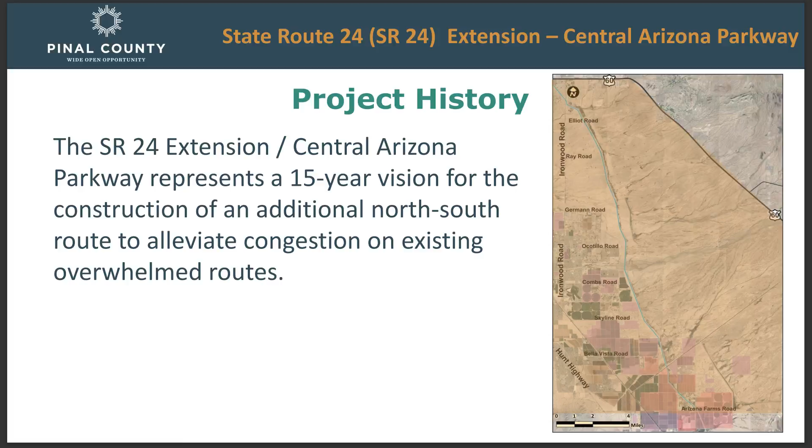As was mentioned, this is not something that has been started recently. When we started looking at these improvements for the last 15, 20 years, many of you may have been to several different meetings held to talk about the improvements. So as we look at this particular area, that's the big picture in 15 years.

These are all the different kinds of planning studies that our various agencies and partners have participated in. These are studies that look at projected traffic numbers, where the development's going to be, where the people are going to be growing, how much is coming into the area. The first one on top is Pinal County's regionally significant routes. Back in 2008, they shared with you a vision for how this area would get developed.

Look at all the particular routes proposed between Santan and 79 in the ultimate future. This is down the ways, but we have to plan for that kind of development, because if we don't plan for it, you know it's going to happen, and we have to have those provisions in place. So just one example of what the county has been doing in terms of looking at the future.

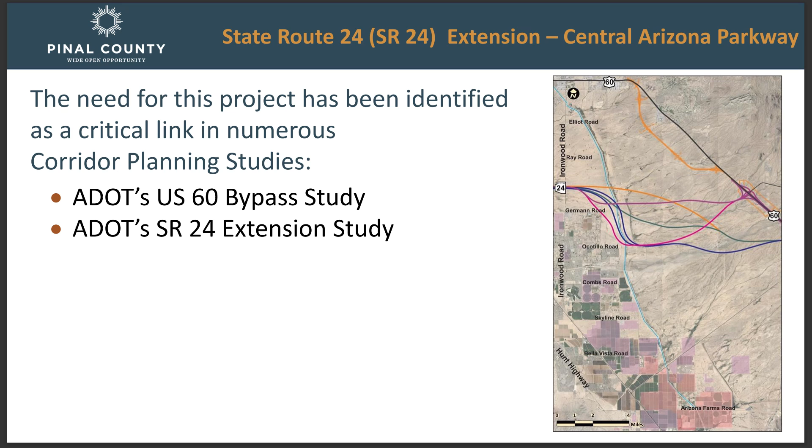ADOT has come up with several different studies. Many of you may have participated in the realignment of US 60 going around the festival grounds and looking at a different route for that. ADOT then continued looking initially at SR 24, extending it to Florence Junction and all points east. We had several different corridors and concepts that looked at that.

Then we've already mentioned the north-south corridor. The north-south corridor you see is a single alignment now, but it had all sorts of different alternatives that were considered at the time when these different alternatives were being developed. So on our graphics, we've kind of shown where those corridors have gone to and where the north-south is shown, where SR 24, we believe, working with state lands and ADOT, will be going and looking at some of those improvements.

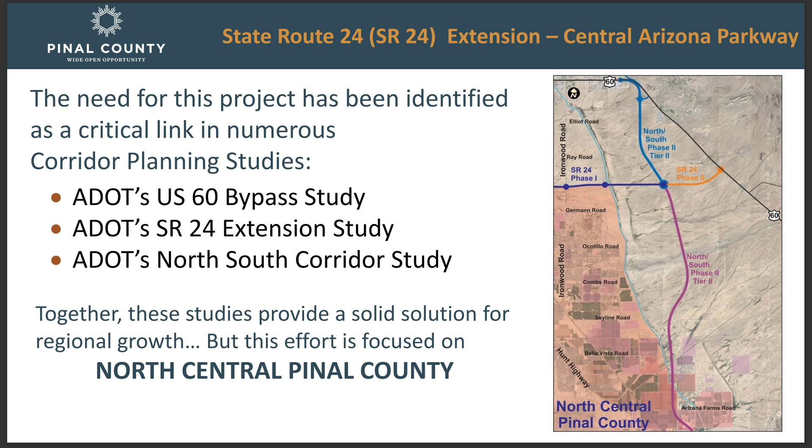Now together, that serves a great regional solution, understanding that the north-south goes from 60 all the way to I-10. Great regional solution, but we're looking at all the congestion going on in this particular area. So that's the north central Pinal County that we're really focused on tonight with these improvements.

So with those other studies, we threw all the alternatives up. You can see there were alternatives that considered making north-south improvements on the west side of the CAP. That became the starting point for some of our alternatives. What we've shown in the back is a series of alternatives that, given the criteria, try to fit a capacity that's not on top of someone's home or existing development. That pushes us almost all the way over to the CAP, but there's still room next to it, and that's where we're trying to fit this facility.

As we get further south, SRP has infrastructure going in next to the canal that doesn't allow us to fit that corridor through that area. SRP is making provisions for the same thing the highway departments are doing, trying to meet power needs. There are generation stations, a combination of solar and gas being built for new generating stations, as well as other power facilities. That made it difficult for us to continue the corridor.

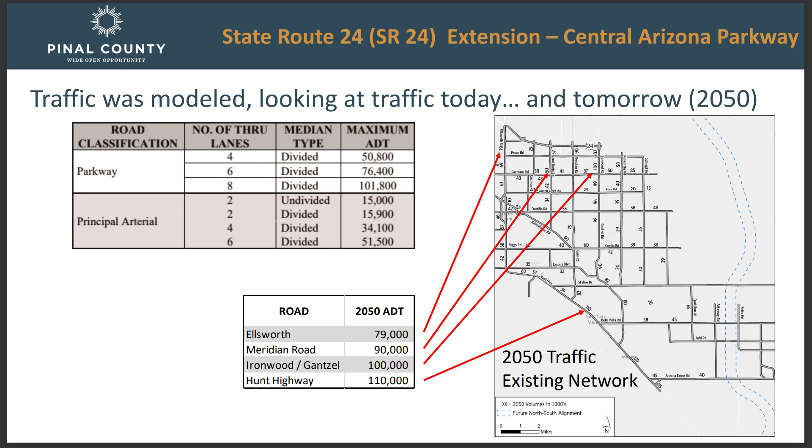You can see that Ellsworth, granted this isn't today but 25 to 30 years out, if we don't build anything else, would be at over 79,000 vehicles per day. Meridian Road, 90,000 vehicles per day. Ironwood, Gantzel, 100,000 vehicles per day.

Now notice what a typical city street can handle. If we put in a 6-lane street, most of the time we call it a 7-lane street because of the turn lane, 3 lanes in each direction, that street can only handle about 50,000 vehicles per day. If we made every single north-south street a 7-lane street, we still wouldn't have enough capacity to bring in the amount of traffic heading south. That's a staggering fact.

Everyone says, well, let's just make the arterials bigger. But when we make the arterials bigger, we have to widen them out, and that takes away homes. When we add to those arterials, we also have to put in more driveways.

More driveways means more access points, and more access points means slower traffic. So it kind of goes against the flow of how we're trying to do a high capacity facility. We're trying to find a location where we can put a higher capacity facility without all those delays.

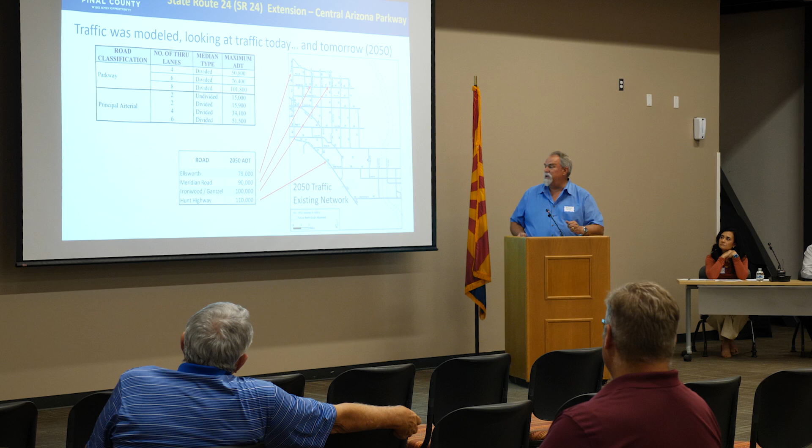Hunt Highway, same thing: 100, 110, 120. Looking at that traffic in the future, the red lines show volume to capacity—in other words, how much the existing facility could handle versus how much it will have to handle.

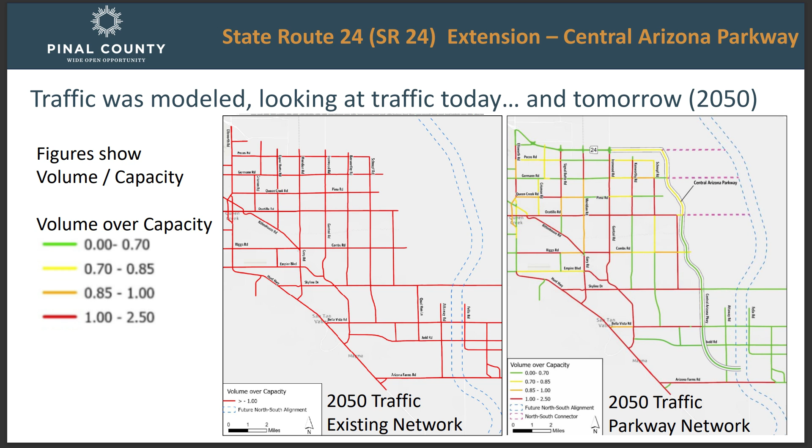Basically everything is overwhelmed into the future. If we were to look at building something like the parkway we're proposing, here's 24, here's the parkway going along the CAP. Look at the kind of impact it has on the rest of the street network. All of a sudden the other streets aren't so overwhelmed. Granted, there's still some red lines on east-west because we're going north-south, and those of you that have to go east-west have limited opportunities. But look at how much the rest of the network improves. It's a major improvement to the area, and that's basically our goal.

Click. Okay. Click. I was deep in thought.

So with those challenges, what kind of facility are we looking at? What is a parkway? Is it a street? Is it a freeway? What are some of the options we're looking at?

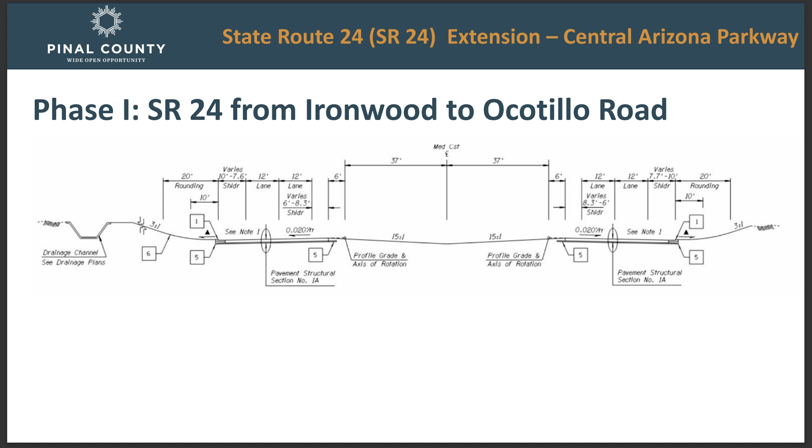Then we'd take that same type of roadway and continue it parallel to the canal down to Ocotillo. That's what we're showing as phase 1. Phase 1 would be built at grade, the same way SR 24 is built today. We would build the bridges in the future that would go over at Germann and Ocotillo. But in the meantime, we would get ourselves almost 5 miles of highway all the way down to Ocotillo to help with traffic movement.

It also allows for future expansion into the median to make that a 6-lane facility in the future. So that's the blue lines we're talking about—you can see the dots. Ironwood already has the interchange. There would eventually be an interchange here, which is just a connection between the Parkway and SR 24.

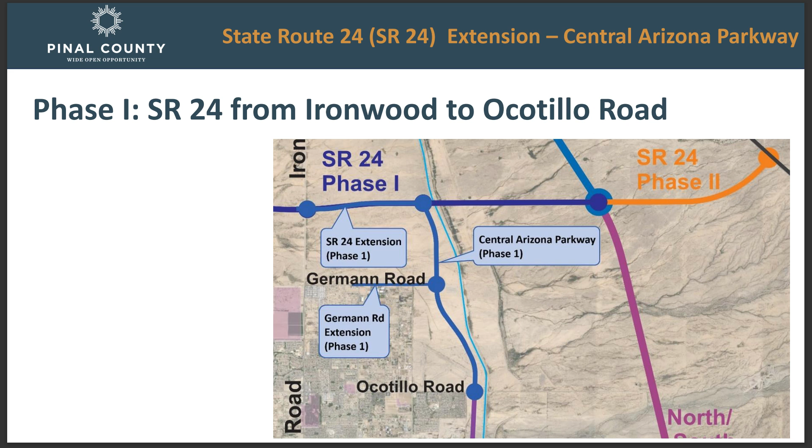SR 24, as I mentioned earlier, ADOT is working with the county to continue it initially north-south and then ultimately tie that into US 60. So this is what we've been describing as phase one. The interchanges are on Germann and Ocotillo initially—they're 2 miles apart.

Federal highways, from a safety perspective, prefers that when we look at these high capacity facilities, we put interchanges 2 miles apart, not 1. Now, how many of you have tried to get on with only 1 mile between interchanges on the Superstition, and simply didn't have enough room to merge and weave, especially when someone else is trying to get off at the same time you're trying to get on? So for all of these, we're looking at a 2 mile spacing between interchanges.

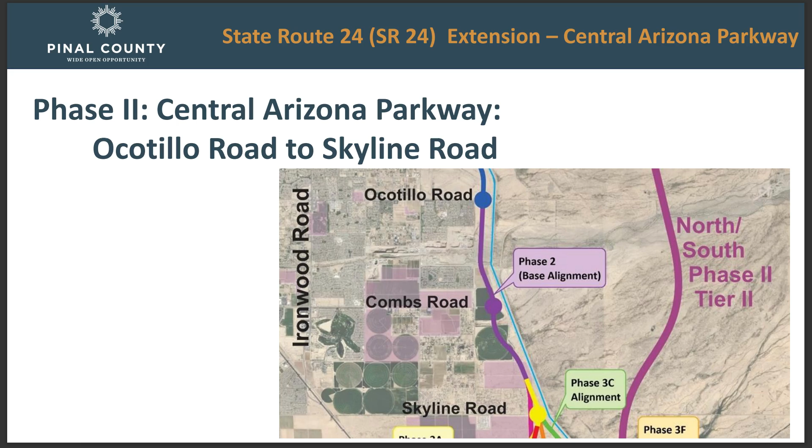And we'll work with the development to make certain all the arterials collect at those points. Continuing, again, we're against the CAP. The reason is there's no corridor anywhere further to the west for us to build something. So we're snug up to the CAP, but you can see where the Queen Creek Wash is—where we have existing developments, we still have quite a bit of room to put that facility adjacent to those existing homes and communities.

With the environmental document, we also do studies for noise and air. So things like noise walls will be considered as we build these improvements, to mitigate the fact that something new is coming next to your community. The argument that 'I moved here 20 years ago and I don't want it to be an urban area' is a good argument, but all your neighbors moved in too, and that's why we're trying to bring a facility in here.

We're trying to make it as quiet and as accommodating as we can, so we'll do the noise improvements and the other improvements we're talking about, and we've pushed it to the side so we take the least amount of impacts. Now, when we get to Skyline, that's the last interchange that we have room to build, and we'll continue to make that a divided intersection just like Ironwood and what you're used to.

But as we look to the south, all of these different areas that are colored in are developments that already have plans. You can see there's an awful lot of developments already platted, plans are underway, construction's underway, and it's very tight for us to do something like an expressway.

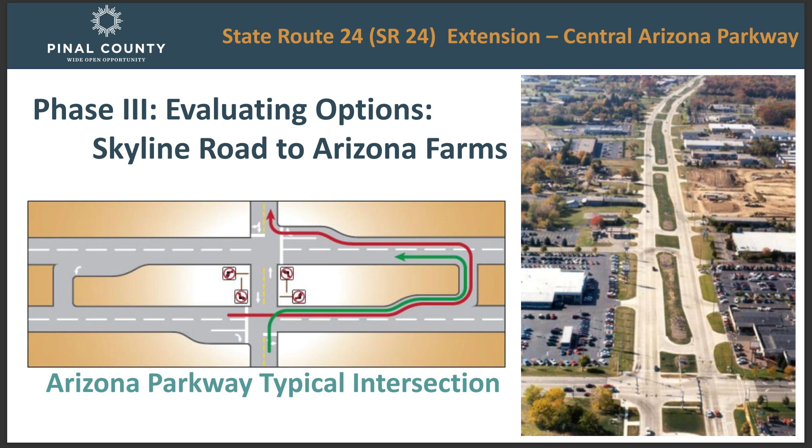So what happens when we come to the major intersections on a parkway, we make everybody turn right. So the first opportunity for a left turn pocket, they make a U-ey, and they can either continue on their merry way on the left, or they can actually come back onto the facility. So it makes the travel a little bit longer for the locals that want to go in the opposite direction, but it allows us to have a facility that we can fit.

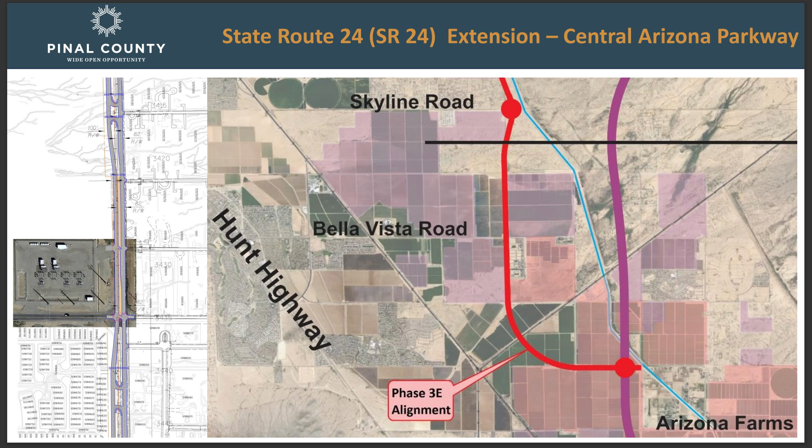On the map shown here, the red line shows an example where there's development proposed, and we have an SRP substation that's already in place. The county doesn't have the money to buy out that substation, so we have to compress the roadway to 2 lanes in each direction, with no left turn. So it's just 4 lanes and a small little median.

But when we get to the north of it, we'll come back and add the U-turns to make the left turns at the intersections. So it'll still allow you to go the way you wish to go. It just gives precedence to the north-south traffic.

The neat thing is, it's a 45-mile-an-hour facility. It's a high-capacity facility, much higher than we would do if we were to put in a 7-lane road, an arterial with the traffic signals and the other facilities and infrastructure.

We're working with the developers to make certain that we have room for the U-turns and trying to put this in such a location where it basically fits. Our goal is to get the Johnson Ranch traffic that needs to get to the Highway Expressway through this area and connect it so everybody can go north and south as efficiently as possible.

So, another inquisitive question: are the alignments the only things you look at? Is it just the alignment, and is it just homes, and is it just traffic? We have a lot of different factors that influence the selection.

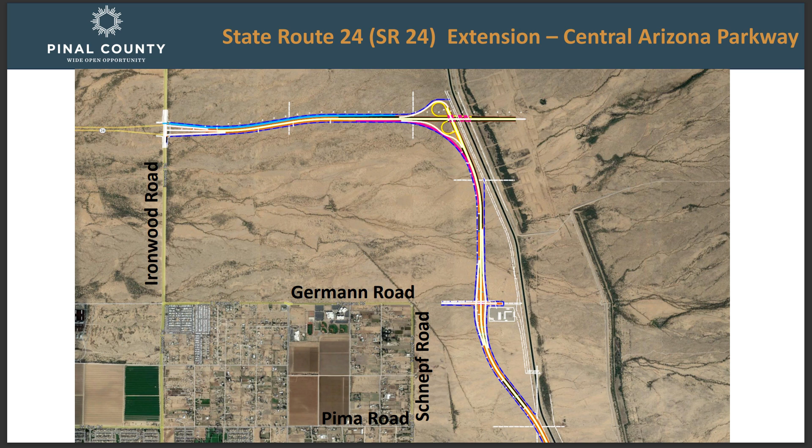So, what does it look like? We have an exhibit on the back that doesn't just have the corridors drawn as a solid line. We've superimposed the aerial and put the line work on it. It's still a small scale, but you can see it in the back of the room. These exhibits will be loaded on the county's website, and you can zoom in and see a little bit better what they look like as you go through.

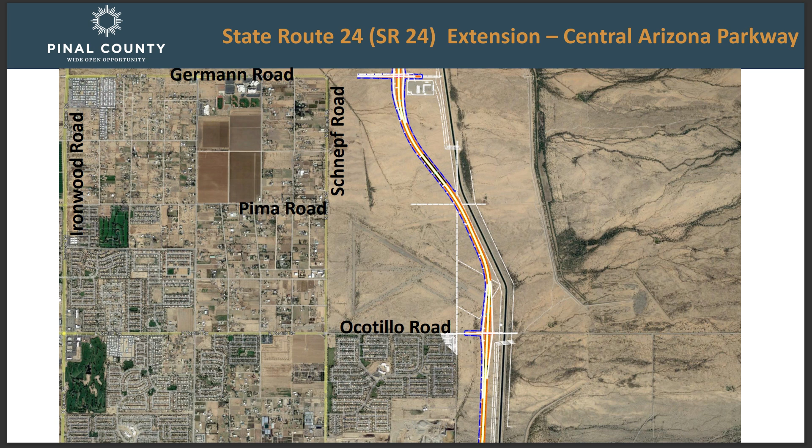So you're coming in off of Ironwood, making the interchange, and then coming down to Germann. We had to get away from the canal because of SRP and the Dinosaur substation. As soon as we pass the Dinosaur substation, we go back to hugging the canal. Continuing from Germann, you can see that we're hugging the canal around the air base, continuing down to Ocotillo.

Now, when we do these, we have to make the opportunity, when that Ocotillo is eventually developed, the CAP is going to require that the maintenance roads along the canal are not interfered with. In other words, Ocotillo has to go over not only the canal, but over the maintenance roads. So we'll have, in this case, the highway would stay at grade and the crossroad would go over that facility, okay?

Can you go back? We cross Queen Creek as close as we can, again staying adjacent to the canal, or to the canal and SRP. When we made the interchange at Combs, we made a kind of an angled intersection so it hugs as close as possible, okay? And we're continuing to go down to the south.

Here you can see we have Skyline, and so that was the last grade separated interchange. Again, they have the same conditions. We have to worry about maintenance for the canal. That's all issues that we have to deal with in the future, okay?

And so then we come on to the new alignment at Quail Run, and this is where we transition from a grade separated facility to the north, and at Roberts Road going south, this is where it's at grade, okay? So this is where it goes into that parkway, the concept I was talking about, okay?

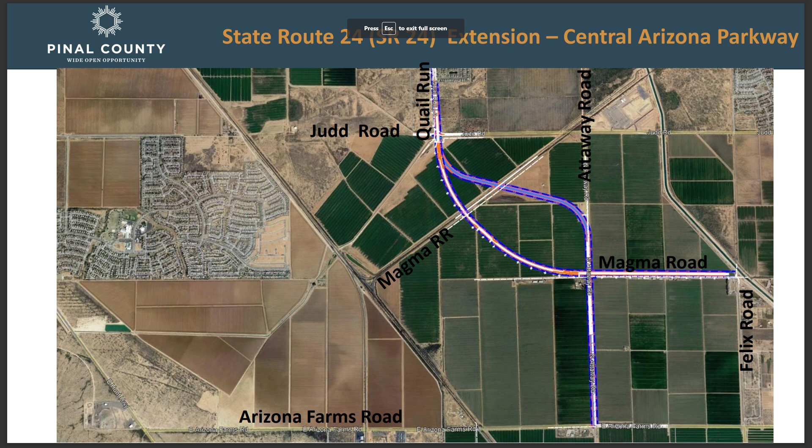We're working with the developers, as I mentioned, in the areas where they already have a plan, between Judd and Bella Vista, but they've come to the table. There's been tremendous involvement with the county and the local supervisor. We've had several meetings with the developers to hash out some of these ideas and get them moving forward.

As we come down to Quail Run, one of the concepts, we still have options we're looking at. One option was to tie in to Magma Road. Other options we might look at include tying in to Attaway Road. There are several developments down here that we're still working with to see how these solutions can best provide access, ultimately to Arizona Farms Road. But somehow or another, we have to get through this area, and some of those folks are here tonight.

We'll continue working with the county on finding a solution to get down to Arizona Farms Road. Okay, what happens next? Everybody wants to know when construction is going to start. It's a process, and I know many of you have been hearing at these meetings that we have to find the funding. The county is working with the state on various opportunities to find funding through grants, tax opportunities, and through the state and counties. At the same time, while we're trying to find the funding, we're doing the environmental clearance documents and other study documents to help clear the path, so that when funding is found, we can build the improvements without delay. It's a hand-in-glove kind of thing we have to do.